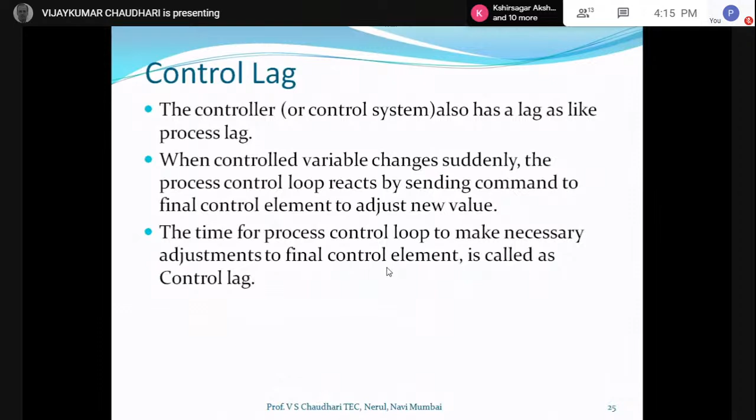Like the process lag, we have time taken by control lag, the controller. Okay, so that is the total delay. Delay from change in control variable to correction in control variable. This is total time lag, and this total time delay consists of process lag, that is the time taken by the process itself, and the control lag, the time taken by the controller.

People are now joining. What we can do now?

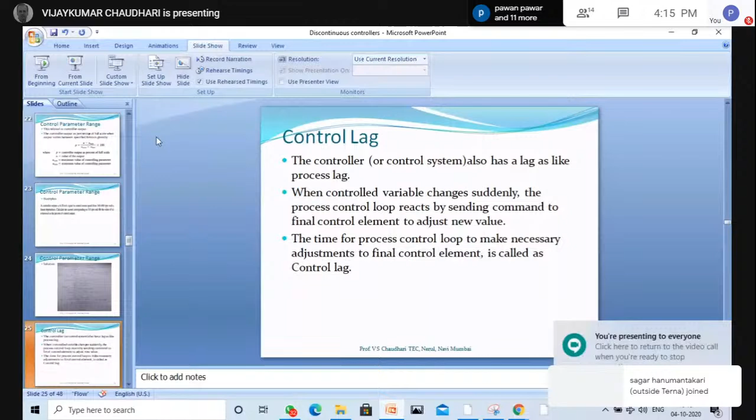So this is control lag. Next is dead time. What is dead time? Nothing happens in this. Okay? Though the error occurs and the corrective action is started, the time between this is called as a dead time. The time elapsed between the instant the error occurs and the corrective action first occurs, started. So in between this time, nothing happens. No corrective action happens, and therefore this time is called as a dead time.

For example, it's a long pipe, at the end of which a large vessel is there. The corrective action for the change of flow rate cannot occur instantaneously, though the controller starts action quickly. Thus there is a period of time during which no effect is felt at the end of the pipe where the reaction vessel is connected. This is called as a dead time. So dead time also can have some effects on performance of the control system. So this is dead time.

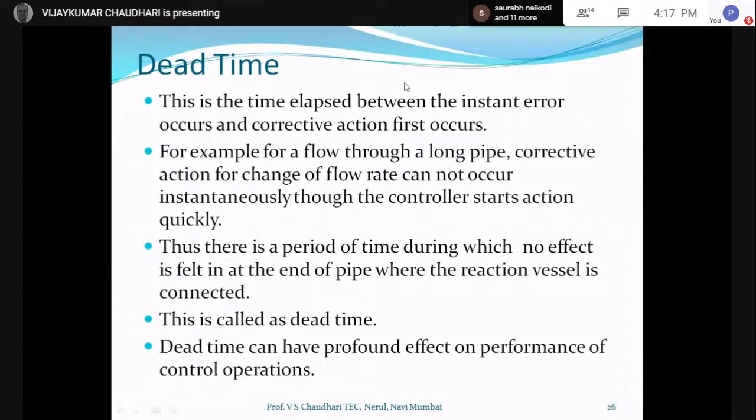Next is cycling, right? These are the oscillations. One of the problems in control is oscillation of the error above and below zero, especially in on-off control or two-position control. This is very important. This means that the control variable is cycling above and below the set point value. 60-degree temperature set, and sometimes it is 65, sometimes it is 55. It oscillates about the set point of 60 degrees.

So if the cycling is indefinite, it is called as steady state cycling. Here the important factors to be considered are peak amplitude of the oscillation and the period of oscillations, error. Whereas if the amplitude of this oscillation decays to zero, it is called as a transient error. Okay, it is steady state error or transient error.

What are the important properties to be considered here for this transient error? What is the initial error? Then what is the period of oscillation? And what is the decay time? So these are the important points to be considered if it is transient error. If these are continuous oscillations for a longer period of time, they are steady state error then. Okay.

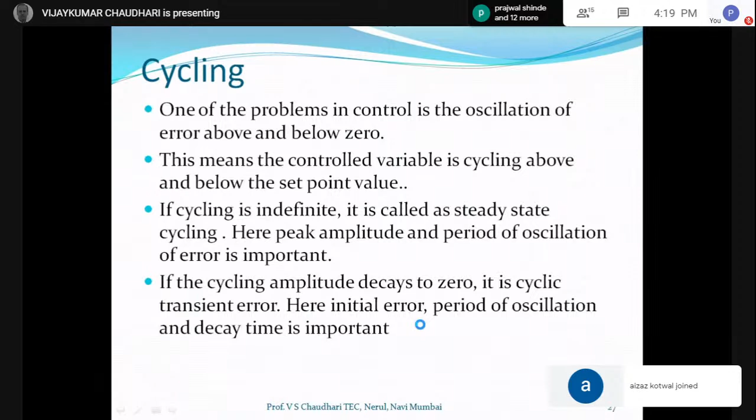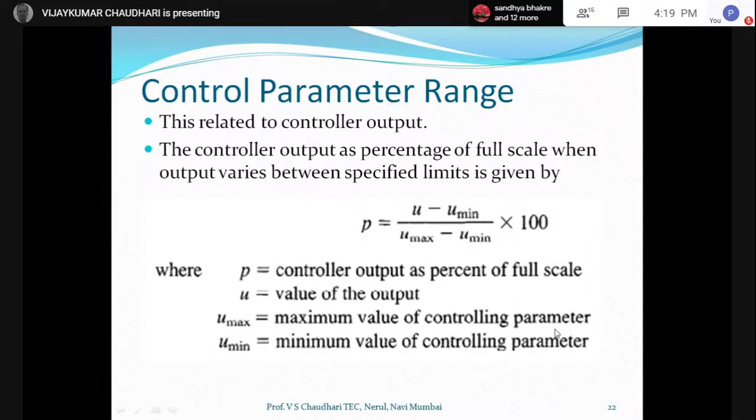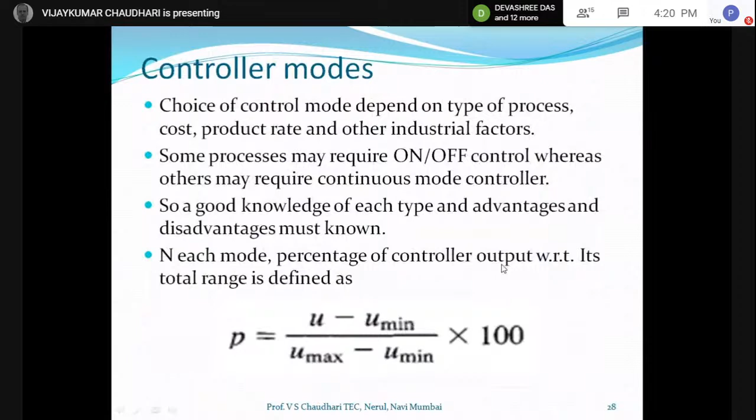In each mode, the percentage of the controller output. We have already taken this formula. P, percentage controller output, equals U minus U min divided by U max minus U min. Controller output is percentage full scale. So P is the controller output at percent full scale. U is the value of output. U max is the maximum value of controlling parameter. U min is the minimum value of control parameter. So the percentage controller output with respect to its total range is defined like this. Okay.

Thus, if the percentage of output of the controller is known, then actual value of control variable can be determined, because the controlled variable depends upon the controller output, and we know the relation between controller output and the controlled variable, right? Suppose the controlled variable is the level of the tank, and controlling parameter is the current. So we know the relation between level and current.

Current range is 4 to 20 milliamperes, and suppose the level to be controlled is 1 meter to 10 meters. So 4 milliamperes will correspond to 1 meter, 20 milliamperes will correspond to 10 meters, and then this level is to be controlled. We know the relation between I and H, the height, that is the level in the tank. So we know the relation between H and I.

Generally this relation is kept as linear as possible, right? So if there is a linear relation, then we can have the straight line equation expressing the relation between the level h and the current I. Okay, so that is said here.

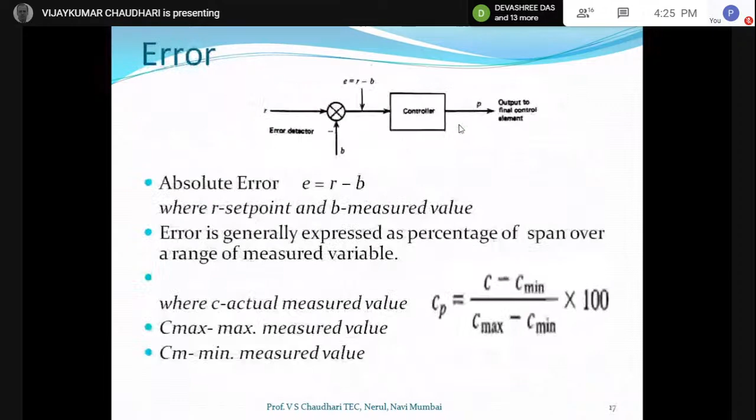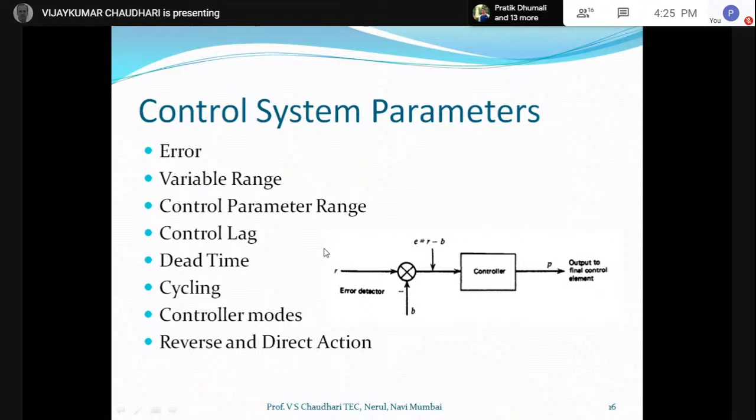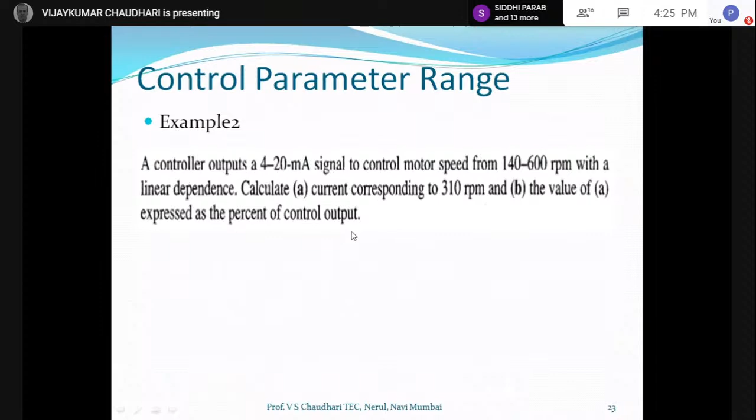So in all, we discussed control system parameters like error, control variable range, control parameter range, control lag, dead time, cycling, controller mode, and reverse and direct action. So this was about the process and the controller. Now we'll be starting the types of control modes. So, what are the types of controller modes?

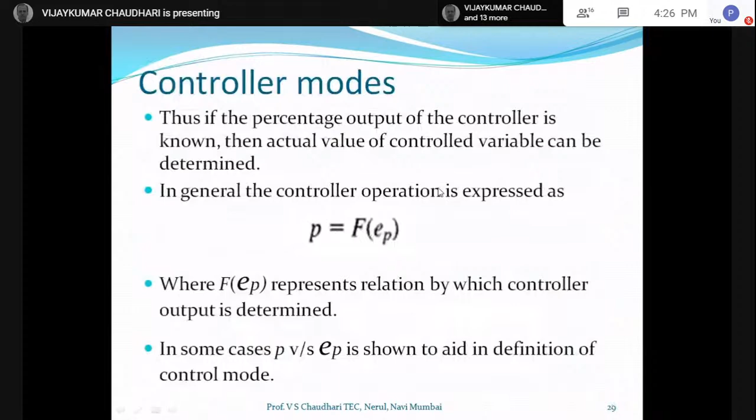Various types of controller modes are there. They are classified basically as discontinuous mode controllers, continuous mode controllers, and composite mode controllers. Discontinuous controllers have fixed positions depending upon the error.

These are classified as two position and multi position. In multi position, generally only the three position controller is popular, because more complicates the process, since the final control element has to be compatible with the controller. So generally not more than three positions are considered. And third is floating mode control. So these are the types of discontinuous control modes.

Next are continuous control modes. In this we have proportional control, integral mode control, derivative control, and composite we have PI, that is P plus I, PD, that is P plus D, and P plus I plus D. That is the ultimate, very popular controller in the industry. These individual controllers are generally not used, right?

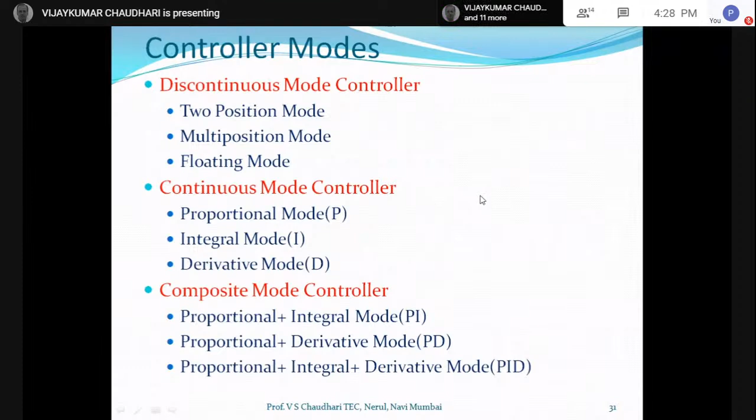Either on-off control, proportional control, PI or PID is used. These four controllers are majorly used in the industry: two position, proportional, proportional plus integral, and proportional plus integral plus derivative. So this is the classification of the controllers. Let us take them one by one. Discontinuous mode controllers: as we see, there are three types of discontinuous mode controllers.

Then, okay, this is the basic mode having only two output positions depending upon the polarity of error. So this is simplest and cheapest and is used when its disadvantages are tolerable. Of course, there are certain disadvantages of this two position controller, and that's why other controllers were invented,

right? They were discovered. Relation between controller output and error is written as P is equal to 0% for error less than 0, and P is equal to 100% for error greater than 0. So we have a set point. With respect to set point, if the error is less than 0, that is negative error, then output of the controller is 0. If the error is positive, that is greater than 0, then output is 100%.

Like our temperature control in room heaters or electric iron, or refrigerators, right? All these thermostat type temperature controllers are on-off controllers. So if the temperature is above the set point, the controller will disconnect the supply of the heater or refrigerator, whatever the equipment or process is, and if the temperature goes below the set point, then the controller will connect the supply to the heater and temperature will increase. So 0 for EP less than 0 and 100 for greater than 0.

Graphically, this can be shown in next slide. It is seen from this expression that if the measured value is less than set point, error is positive and output is 100%. If the measured value is greater than set point, error is negative, EP less than 0, output of the controller is 0%. Room heater is a common example. If the temperature drops below the set point, heater is turned on, while if the temperature goes above the set point, heater is turned off. So this is the two position control.

So let us discuss what is neutral zone. This is very important in case of two position control. Suppose our set point is, say, not 100 degrees Celsius, our room temperature, and we have a set point of room temperature to be 25 degrees Celsius. Now the controller, whatever thermostat it is, the controller output will be dependent upon the actual temperature in the room that is sensed. There will be a sensor sensing the room temperature, and that will be compared with the set point.

So if the actual temperature sensed, the controlled variable value, is exactly equal to 25 degrees Celsius, which is the set point, then controller output will be 0. The controller will not have any action. But if it is 24 degrees Celsius, less than the set point, then the controller will connect the supply to the heater, and heater will be on. As soon as the temperature increases from 24 to 25, which is the set point, and exceeds it, becomes 26, the controller will cut off the supply.

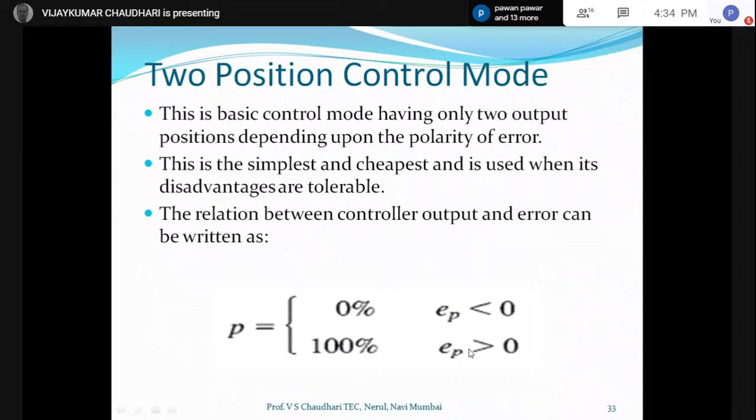As the supply is cut off, due to environmental condition, temperature drops. Again, temperature goes below 25, and the controller switches on the heater. As the heater is switched on, temperature goes above 25, say 26, and the controller cuts off the supply, and temperature again drops. So, what is expected? Suppose the set point was 25, and the equation is EP less than 0, 0%, and greater than 0, 100%. With this relation, if the set point is 25

and the controller senses that the temperature is 25.0000001 degrees Celsius, the heater will switch off. Due to environment condition, temperature drops and it becomes 24.999999, and it compares with the set point and observes that the error is greater than zero, a positive error. So it switches on the heater. So what happens is that the controller will constantly switch on and switch off, switch on and switch off. This is called chattering, or oscillating.

So controller output will be continuously oscillating, and this is not only harmful for the controller, it is harmful for the process also, the controlled variable, the process output. So that's why a range of controlled variable is fixed above and below the set point, so that unless and until the controlled variable value surpasses that range, the controller will not change its state from 0 to 100% or 100% to 0.

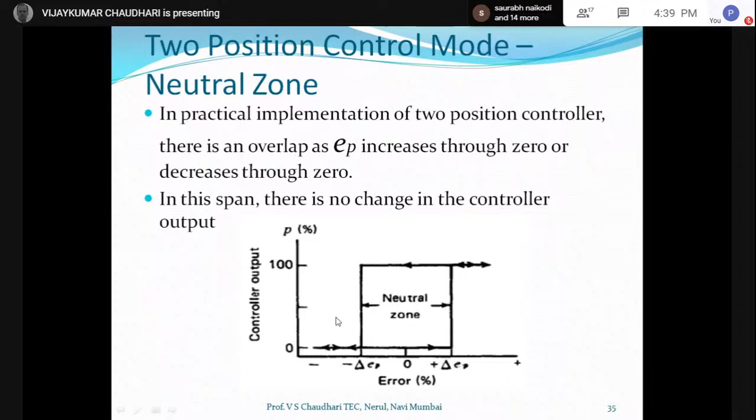In decreasing, the error must fall by delta EP below 0, and controller output then changes its state to 0%. So total range becomes delta EP plus delta EP. It is 2 delta EP. So the range of 2 delta EP for which the controller output does not change is called the neutral zone or differential gap. This is very important in case of two-position controllers.

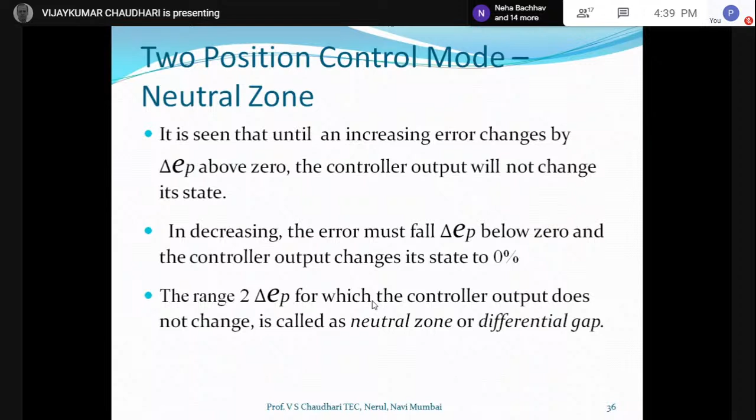This neutral zone or control differential gap is purposely designed above a certain minimum quantity to prevent excessive cycling. And in an instrumentation system, this type of property is called hysteresis. Hysteresis in other systems is undesirable, but in on-off control, it is purposely added. This zone is purposely added. So this is desirable hysteresis.

Like hysteresis in gears. Two gears are contacting each other and rotating. One side of the tooth of the driving gear is contacting a specific side of the tooth of the driven gear. So they are in contact and rotating in clockwise direction. Suddenly, if the direction of rotation changes, there will be a small span when there will be no rotation at all, because the opposite side of the driving gear's tooth has to contact the other side of the driven gear. So there will be a gap between the teeth.

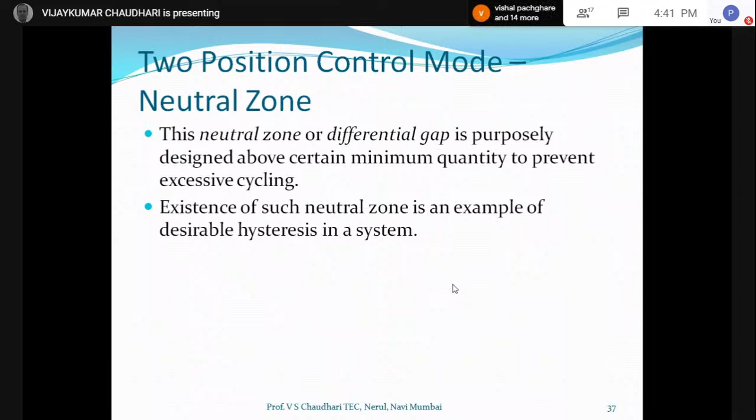The gap between the teeth of the driven gear and driving gear means that during that period of time there is no change in output. So this type of property is called hysteresis, and that is actually undesirable. But in case of an on-off controller, this is purposely added to the system so that excessive cycling or oscillations will not be there and it won't damage the controller and process. Let's have an example on this one.

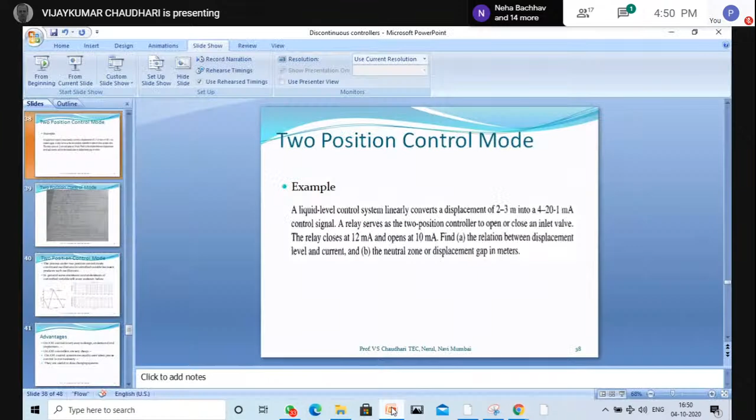See, the range of the displacement level is given as 2 to 3 meters. Range of the control signal is given as 4 to 20 milliamperes. Type of controller is the relay, on-off or two position control. Relay closes at the higher level, 12 milliamperes. Relay opens at the lower level, 10 milliamperes. Relation between level and current is given as linear.

So let this relation be expressed as h is equal to kI plus h0. Putting the values 2 and 3, 4 and 20, we get 2 is equal to k into 4 plus h0, and 3 is equal to k into 20 plus h0. Solving this, we get k and h0. So the relation that is asked for, find the relation between displacement and current, is h is equal to 0.0625 into I plus 1.75. Okay, and what is the next part? Neutral zone is to be found out.

We will find that from these two values. Putting these two values, we will find h, and the difference between the higher level h and lower level h will be the neutral zone. Understanding or not? This corresponds to the higher level, this corresponds to the lower level. So the difference between the levels—unless and until this difference is overcome, the output of the controller will not change, right?

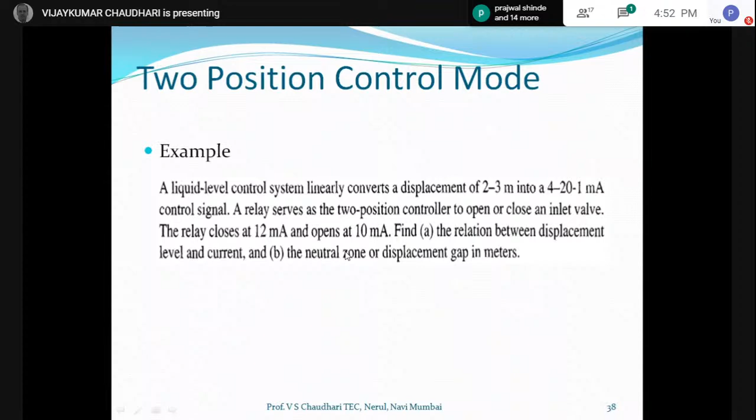Relay opens at 10 milliamperes, which is the low level. So HL is equal to this plus this one, so 2.375. So the range of the level for which the controller output will not change is higher level minus lower level, HH minus HL, 2.5 minus 2.375. So the neutral zone for which the output will not change is 0.125 meter. Okay, so this is what is the neutral zone then, right?

Let's move further then. Now, what is the graphical representation of this? And what are the advantages and disadvantages that we will discuss of two position control?

The process control under two position mode has continuous oscillations in the control variable because it produces such oscillation. It is a property because unless and until the control variable value exceeds above or drops below the set point, the controller won't take action, right? So control variable has to exceed the set point or drop below the set point, then only the controller will give output. Okay, it has this basically inherent property like that.

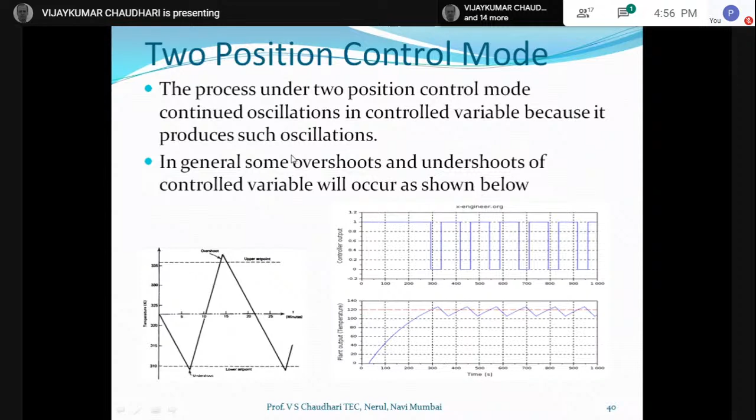So overshoots and undershoots will be there like this. That is not avoidable. Okay, this is a non-avoidable property of two position controllers. So what are the advantages then? These oscillations are bound to be there. What are the advantages and disadvantages then? Two position controller is very easy to design, that's why everywhere we use it, right?

Especially for temperature control, most of the devices are using this, right? Where the exact and sudden changes of temperature are not to be controlled, then generally the type of controller used is the on-off or two position controller, right? They are cheap rather than other types of controllers that we will discuss, proportional and especially PID controllers are very costly, right? Unless and until the process demands very accurate control, we won't go for PID, right? So as far as possible, the cheapest controller is on-off or two position controller.

Okay, they are used where precise control is not necessary, as we saw, right? Where overshoots and undershoots are tolerable, then only this type of controller can be used. Okay, and they are useful in slow changing systems, okay, like level control in large tanks and temperature control, right? So in such systems, two position controllers have an advantage over other types of controllers.

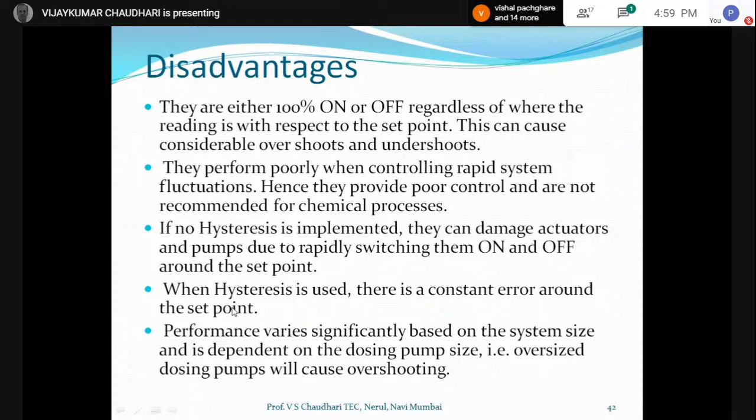So that was the major disadvantage, and neutral zone has to be provided deliberately. The hysteresis gap, differential gap has to be provided. Otherwise, the final control elements and the process, like actuators and pumps, will be damaged. Okay. Even though hysteresis is used, there will be a constant error, delta EP, present on instances such as room heaters, air conditioners, level control of large volume tanks, etc. Right? So these are the two position controllers.

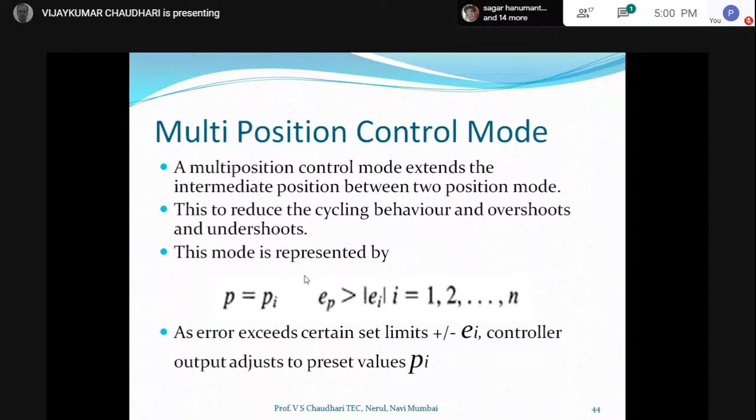Now, multi-position controllers. But the time is over. We'll discuss multi-position and floating control modes in the next lecture, tomorrow. Right? Let me mark the attendance.